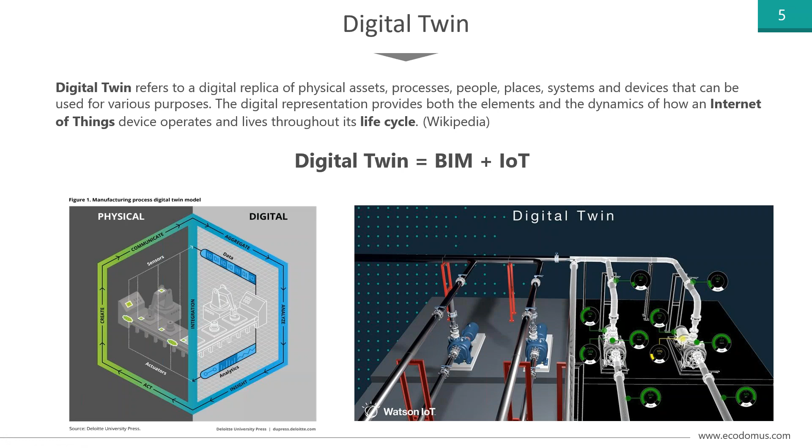As an example, I will show you the digital twin for one of our clients - it's the Sydney Opera House. I assume most of you guys know this building.

So here within Ecodomus, we will just show how the guys are using it. It's taken from the presentation the Opera House guys did themselves at the recent Build conference in Australia. All right, so here's the model.

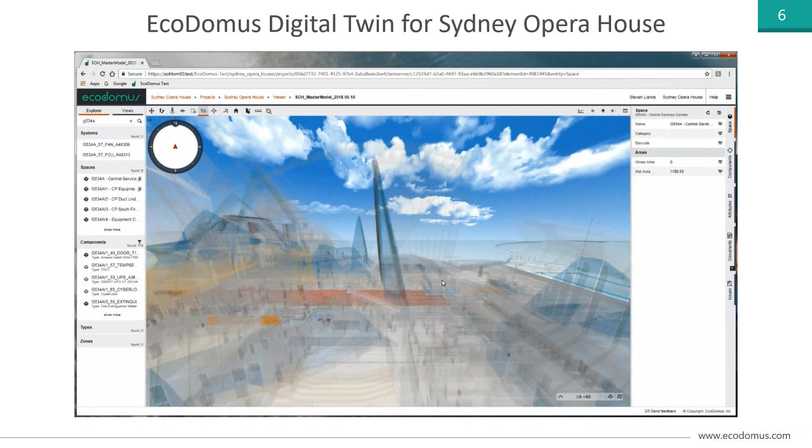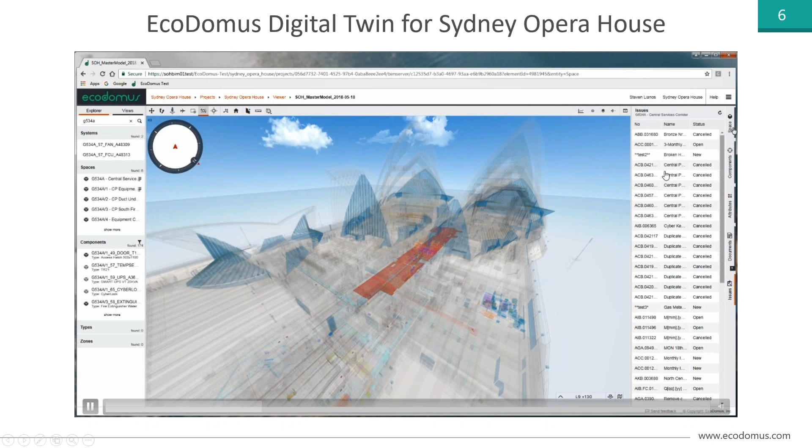So the user is looking for the space G534a. It finds some systems related to that space, finds a few spaces that have G534A in its name. So here's that corridor - now we look at all of the assets that belong to that corridor. We look at the attributes of that space, the documents associated with that space, and the issues or work orders associated with that space. So we have a lot of different information about it.

Let's say we want to move in and zoom in here. We remove the semi-transparency to look at the details a bit more. Here I selected a lighting fixture and look at its properties.

All of these properties have been extracted from the Revit model that the Opera House maintains. So I look at its attributes, I see the documents that are linked to that lighting fixture - I pull up this 50-year-old drawing for the lighting schema. And from here I can also navigate, go around, and I noticed there's some tag associated with some box here - so what is going on here?

I select this box and I see that there's an open issue. What kind of issue? There's a broken handle for this box. All right, so we'll handle it better next time.

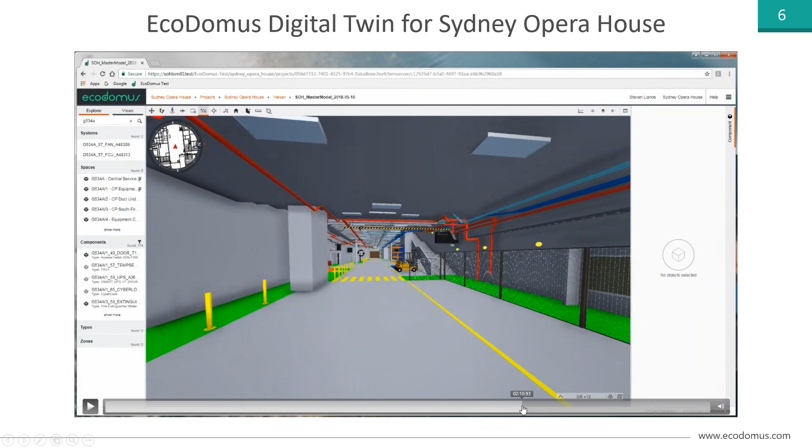Now I walk down this corridor. We are underground right now, below that top building. We can go to the chiller room here - most of you guys have seen chiller rooms like that before.

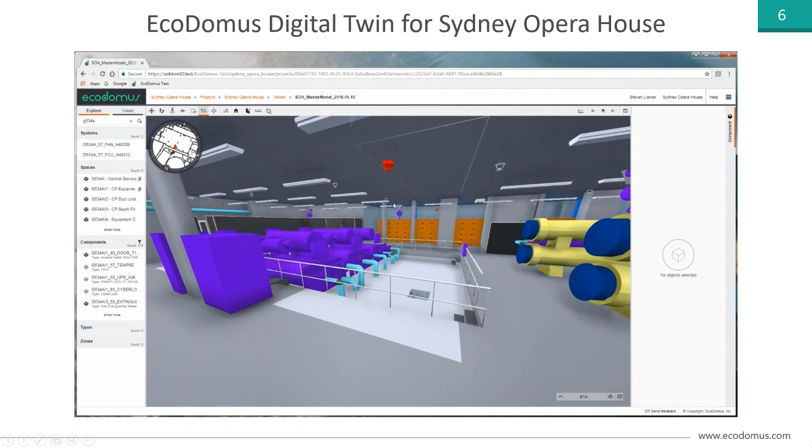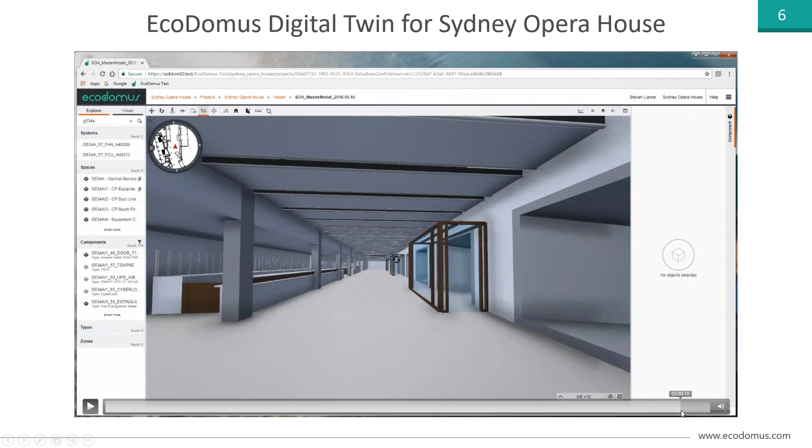Okay, so now we go into the stage. Turn on the layer with the chairs. We can review what the chairs are, or just walk down this corridor and go back outside. All right, so this is what BIM provided the Opera House.

And now we can just take as an example one of the rooms here and navigate within this room and look at some of the objects. So I see here there's a box - what is it? It's the secondary heating water pump.

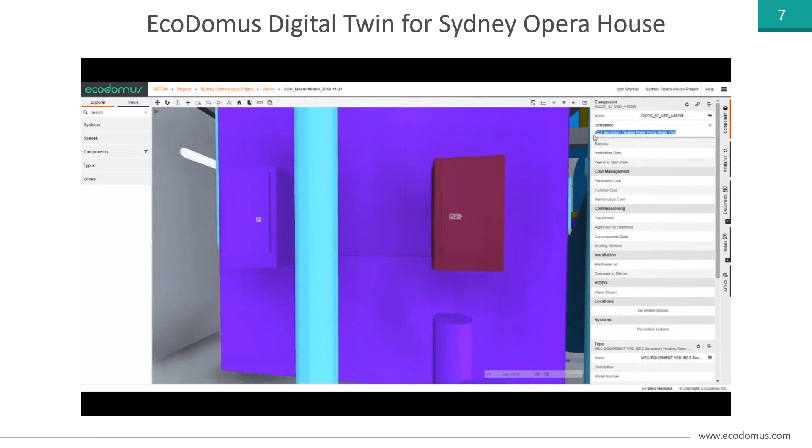And I believe I have some data linked to it from the sensors - some demo data sets from sensors associated with ducts. So I can review how these sensors have been performing. The data points can be linked to any object within the model. Okay, so that's how we are looking at it.

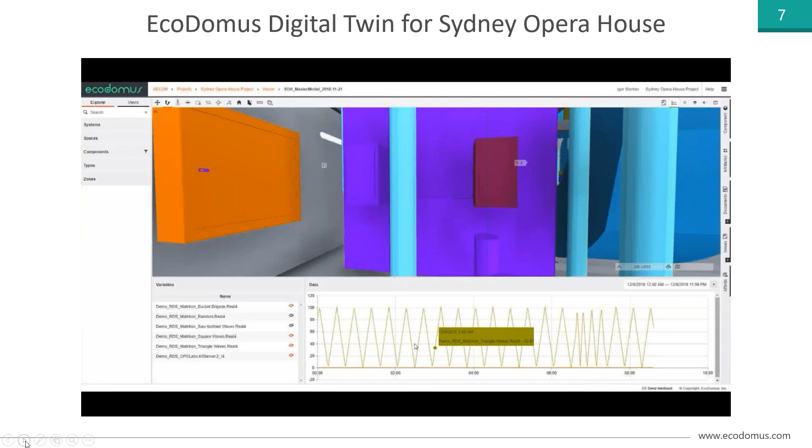I'll talk about some other applications that the Opera House is using where we'll talk about integrations, but this is just an example of how a digital twin can be used. Why would we need it? Why would anybody need it? There are lots of different use cases that can be applied and bring benefit to the end user.

As a case study, I took an article I saw online about a London airport - I don't remember which one - but they had a power supply issue. Something happened with the electrical system, it failed and crashed their servers. Obviously nobody knew exactly what happened because 99.9% of people have their electrical systems defined as a piece of paper, like here on the drawing.

What can we do with it? We can actually build a schema where the elements are still represented in a 2D diagram that is easy to understand for the traditional mechanical or electrical engineers, but this schema is linked to the BIM object.

So I can click here on this panel board and it will take me to the panel board's asset page, where I can review it in 3D BIM, see its real-time data points, or just embed values from the sensors that are linked in real time to the IoT BAS sensors.

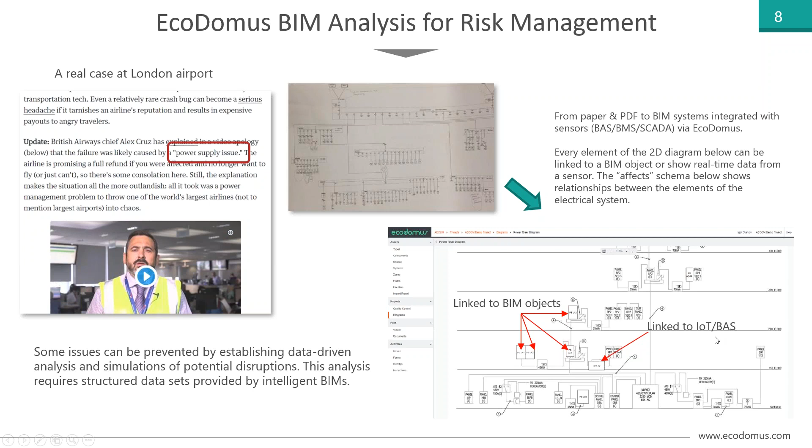Another use case happened at Moscow airport, where they had a small fire in the baggage sector in a small room, but the smoke got into the main terminal and they had to shut down the terminal for the whole day. The losses from just one day of 50 flights delayed could have covered the whole BIM, GIS, and sensors implementation for the entire airport. What we could have done is identify which dampers need to close automatically, or need to be closed manually, by connecting the sensors and the BIM.

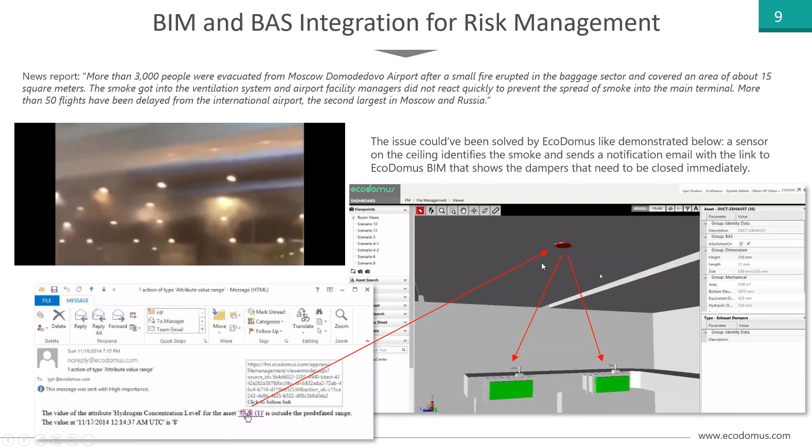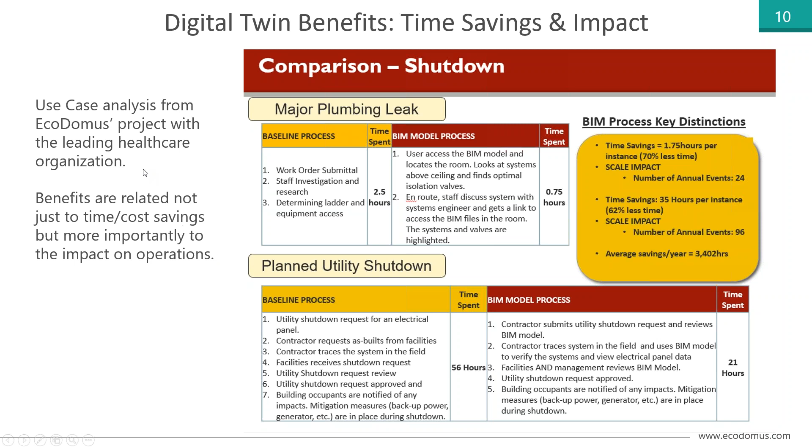Another use case relates to a client we had in the healthcare space. They analyzed the time spent on things like a major plumbing leak or a planned utility shutdown. Using BIM, IoT, GIS and other integrated technologies, that time could be significantly reduced. After extensive calculations, they identified how much they could save in money, but even more important was the impact savings for the healthcare organization or critical facilities like data centers. It's not about the cost of the engineer, it's that every minute costs tens of thousands of dollars. This kind of analysis shows the benefits of utilizing this technology.

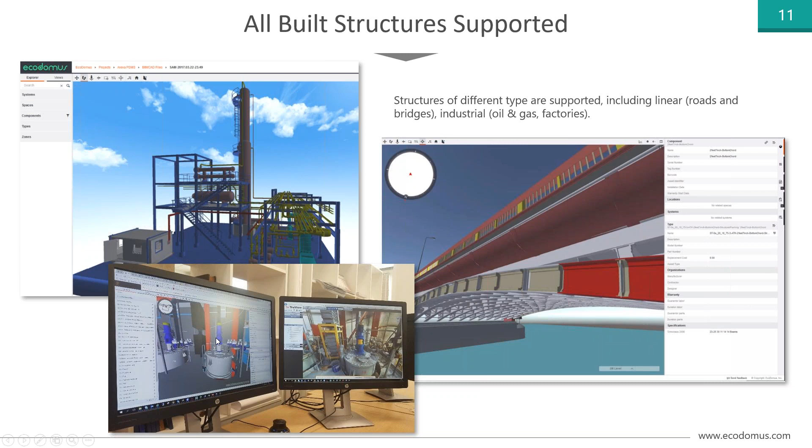And it's not just for buildings. Here are some other examples of digital twins. You can do that for oil and gas refineries, for bridges and highways, for industrial facilities like factories, process plants, wastewater treatment plants—all different kinds of structures. For the software, it doesn't really matter whether you deal with a kindergarten or a nuclear power plant, it's just a matter of scale, at least for our software.

So what is CDE now? We discussed that a digital twin is great, but how do you get it? You need an environment where you assemble all the information related to this model, and connect it to the sensors and everything else. CDE, Common Data Environment, is well known in the UK and Europe because it's part of the PAS 1192 standards, but not as well known in the United States and other parts of the world. CDE is a central repository where all of the facility information is housed. Contents aren't just limited to assets, but also include documentation, graphical models, and pretty much everything.

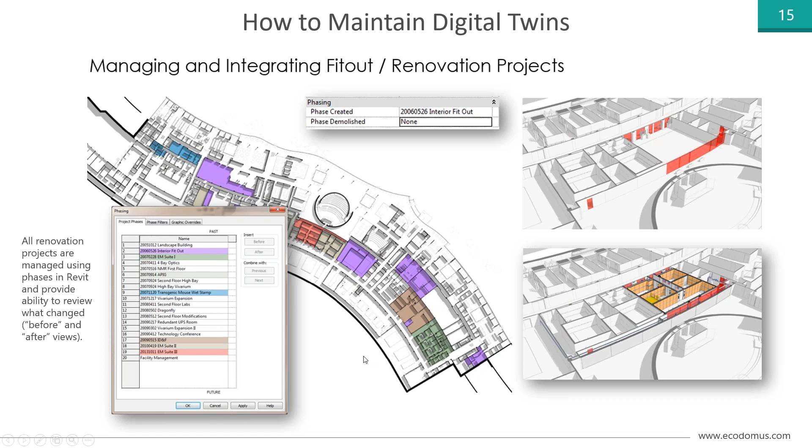So they have the complete history of the building, and imagine the value of that where you know everything that happened. It's the same as when you get a car and the seller gives you all the oil change documentation and everything is clear what was going on - you'll get maybe 5-10% extra added to the price. With buildings, it's as if nobody cares, but it's definitely valuable to have the historical information. It increases the resale price.

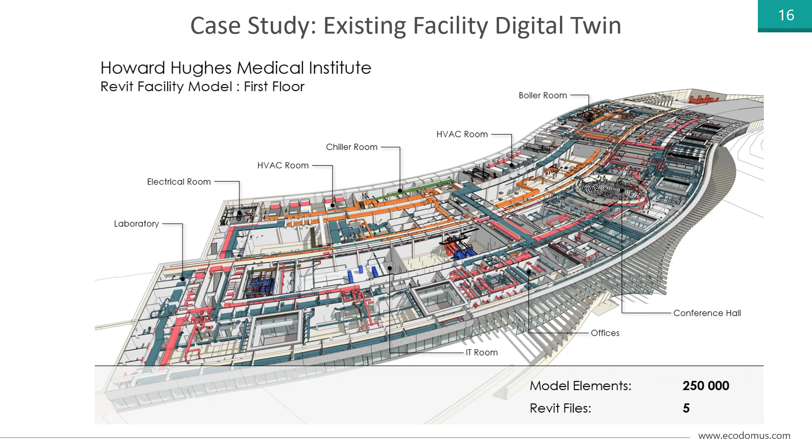Here's the same facility. One interesting fact is that this model was developed for the existing building - it was not built from BIM from scratch. This was done over 2-3 years. They didn't rush it; it was a background activity for the client, built as they had time, as we were helping them with it. It's a complex, curvy building - I don't think there's a single 90-degree angle here - but all of it is highly accurate and all the systems have been connected.

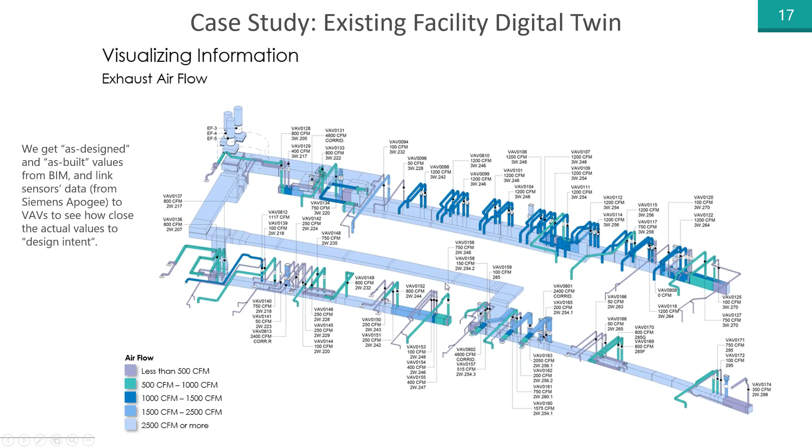So what we're doing right now is connecting all of these VAV boxes, with data calculated in Revit for how they're supposed to run. We're linking it to Siemens Apogee BAS, and now we're seeing how it's supposed to run versus how it's actually running, so the end user can analyze what they need to do with it.

What kind of standards exist for all of this work? We showed you the benefits and how it's supposed to be built. The standards we like are primarily based on the UK 1192 standards - that's where the definitions for asset information requirements come from: asset information model, project information model, etc.

US National BIM standard - I'd say it's okay, but nobody's following it. I know because I was part of creating it. It's a bunch of volunteers who spent some time and did it, but we didn't have the significant financial support that the British guys had.

So what typically is important when you develop these information models? What requirements matter? You need to define the asset types relevant to your use cases, what attributes you want to collect, what document categories you have, how you're going to be collecting this data, how you can be preparing, and when this data is going to be collected - obviously not at the last minute.

We want to do it throughout the whole process in order to establish quality control properly. Who is going to be collecting this data? It's not just that one BIM guy in the corner who needs to do it all - it's impossible. If you need to collect the project information model correctly, you need a lot of people involved.

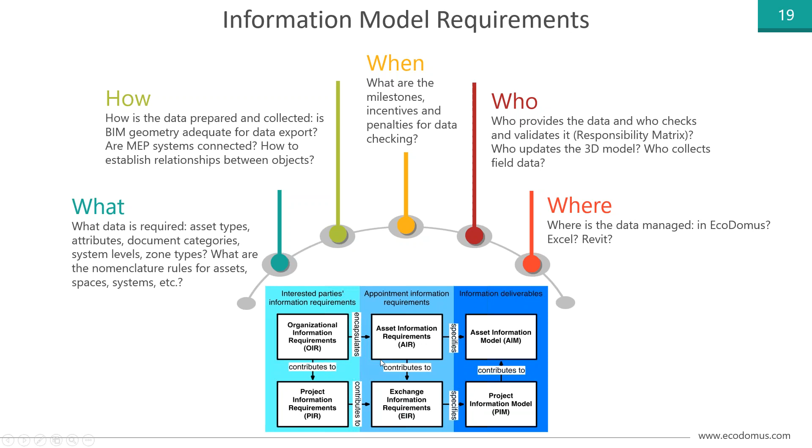Now let me show you some examples of how this data is all being collected. First of all, yes, this schema is what you probably have seen before. This wedge schema is BIM level 2.

Right now, as mandated in the UK, everybody talks about level 3, but it hasn't been formalized yet. So where we are right now, the red line here, is everybody is more or less comfortable with level 2, but doesn't know what to do with level 3. Level 3 is actually going to be a pretty interesting thing. It's looked at as an integrated web services BIM hub, where all of the applications talk to each other in real time using web services.

We were doing this from the beginning, using web services and doing the integrations and collecting all of the data. That's why we believe this is pretty much doable even now, without waiting for BIM level 3 to be formalized.

So this is a good schema to show the PIM, project information model, and asset information model, right? So it starts in design, goes through construction, into handover, and then into operation and maintenance, and then starts again, right?

The good thing about the standards, the ISO standard, was just approved, I believe, in December of 2018, for ISO 19650-1 and -2. Two of the sub sections of the standard have been approved. This third one, 19650-3, is now under development. So 19650-2 is about the handover, and 19650-3 is about operational use.

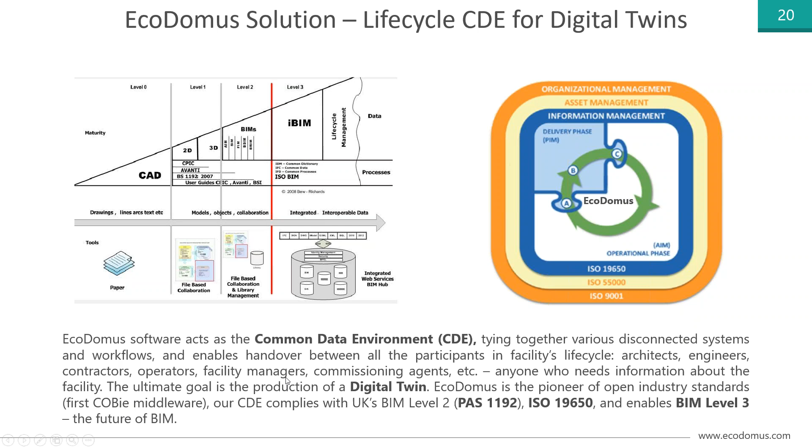What I would suggest also to think about is what's happening on most of the projects versus how it's supposed to be done, right? So I showed you examples of good digital twins, but unfortunately that's not the reality.

The reality is, what we get on average on so-called BIM projects, they are not really about information modeling. They're all just about 2D deliverables, really bad naming conventions, properties are missing, systems - nobody really seems to be interested in connecting systems - duplicate assets, surface overlaps, etc. So we get really bad models a lot, and sometimes we spend months, if not years, to clean them up.

So what we suggest is, before you start modeling, establish proper requirements, establish a systems matrix, establish naming conventions, define all of the attributes, define the QC procedures - because otherwise all of these standards don't really mean a thing, right?

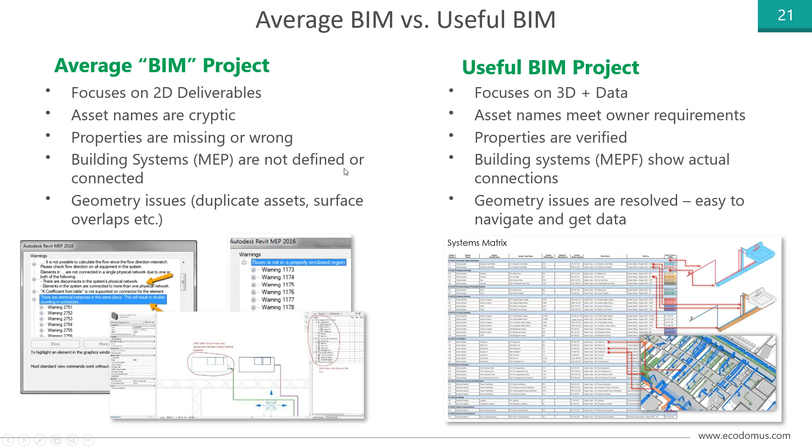What we see is that it's not just because everybody is lazy - it's a lot of times because the owners didn't specify anything. There are no requirements. When they don't ask for anything, then the contractors and architects don't know what to provide. The other thing is, even if you use an advanced authoring environment like Revit or ArchiCAD or Bentley, quite often you're not using it to full capacity.

You still continue to draft in it, because if the final result needs to be produced as a 2D drawing, then why do I care about the systems, let's say, right?

The good thing about the standards, especially UK standards, is that new types of job descriptions are being introduced, like information managers. So it's not just the clash coordination guy like in the past. There are new types of employees focusing on the quality of information - information managers. So we suggest thinking about having these information managers, which is a cross-discipline position. They need to understand not just what the BIM looks like, but also what the other applications involved look like - their data structures - project management solutions, CMMS, CAFM, and other solutions, right?

Again, think about the tools you're going to be using. Obviously, if you use Excel, you're going to be limiting what Excel can do for you. Schedule delays - I always suggest linking the data collection activity to your construction schedule. Very few people do that.

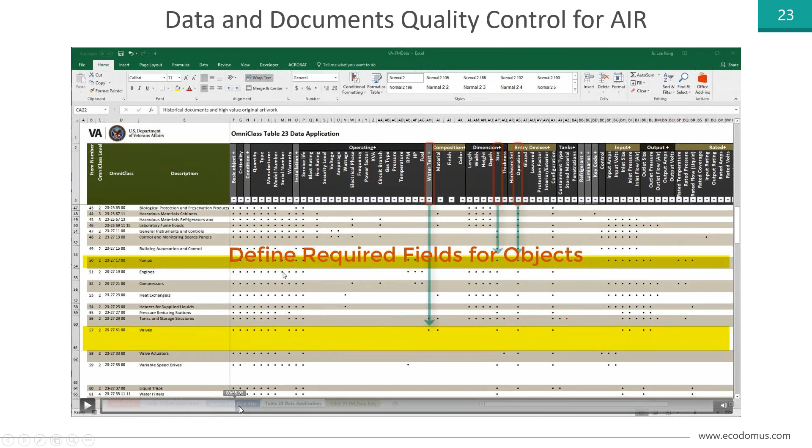Within EcoDomus, we can actually establish a similar schema. We can define the structure of the disciplines and categories required, and we can define the list of the fields that the customer cares about, and what are the standard naming for those fields. And then we can build a structure where we map required fields to required categories.

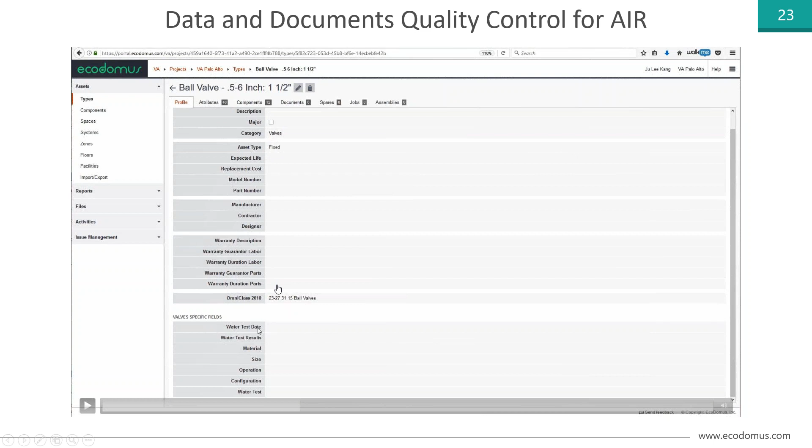Let's say for pumps, we need this field. For valves, we need this field. And these fields will be shown on the interface when you collect that data. Let's say I have extracted data from a model. I see my ball valve. I see the generic fields needed, and I see valve-specific fields needed. So I'm not looking at 150 different Revit BIM object files from the BIM library and figuring out which ones I need to populate, which I don't.

Then we can define the requirements for different stages. Let's say for the as-built stage, we specify that for pumps we need these fields as mandatory, and for valves we need some other fields mandatory. We can also establish ranges of acceptable values, lists of acceptable options, or other predefined values within the fields. We can also define what documents are needed for different types of equipment. So all of it can be set up in the configuration.

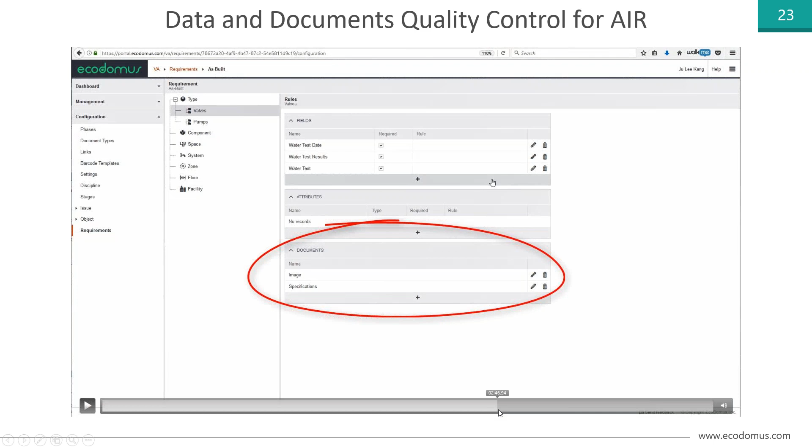And then we run our quality control, and we understand what is it that we're missing. So let's say here in this specific example, we see that our valve is missing these 3 fields and those 2 documents. It's easy to fix. You can select your documents and just drag them into the application here, and it will upload those documents, and the documents will no longer be missing.

So it's not like in Solibri where you need to republish the IFC file, then somebody fixes the original model, then republishes the file, then it goes back and forth. The same system is used for both data collection and for quality control.

The other thing that I do like is building custom saved queries, or we call them filters. You can define any criteria for any attribute for any type of your entity within the model. Let's say for systems, for types, for components, for spaces, you can use the standard attributes to build formulas and save those formulas. Let's say your doors need to start with DR dash and then some number. That's just a formula that's developed and saved, and everybody can reuse it.

Here's an example of how we can do that. Let's say we have here a bunch of various filters. The first filter I will open is called VAVs that cost more than $200. So name contains VAV, purchase cost greater than 200. I found 15 types of VAVs, actually components of VAVs that satisfy that condition, or assets that are commissioned in January 2018.

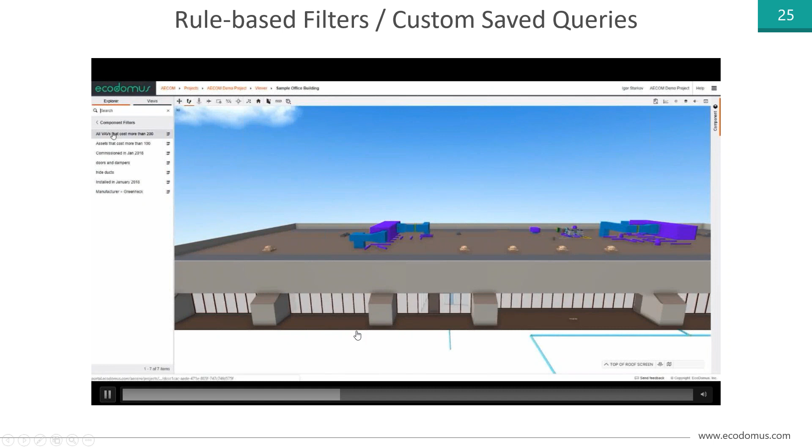Filtered, and I found them. I can use the same filters in the viewer. So I select the viewer, select the filter, all VAVs costing more than 200, and I see all of those VAVs, 15 of them. And to see them more clearly, I change my opacity in the viewer a little bit so they are more distinct.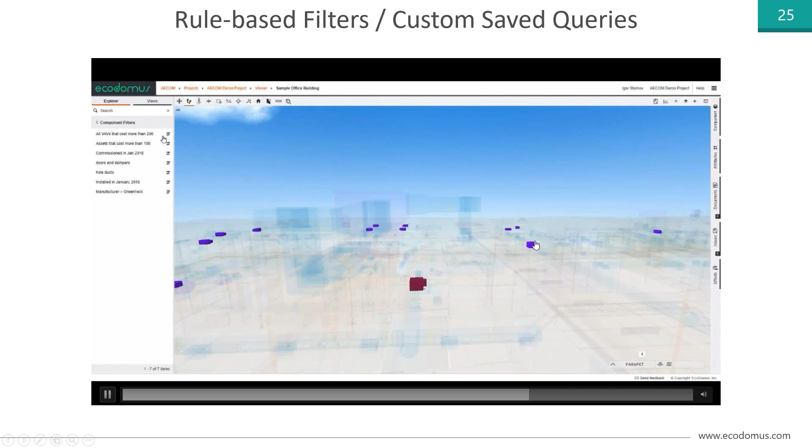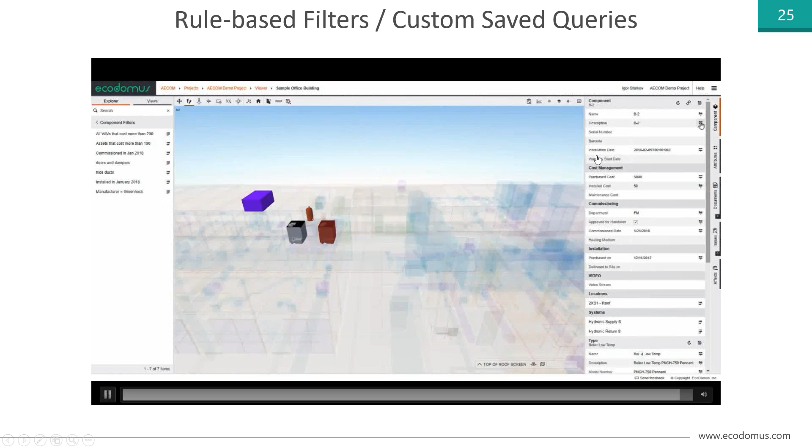So, this VAV is VAV1103, and I see its properties, attributes, etc. Or I can navigate through the list, select this VAV1120, and find it in the model. The same way I can go into my commissioned in January 2018 filter, and it finds me objects that have been commissioned in January 2018. Select this boiler, and I look at its properties and investigate it further.

So in order to ensure that, we suggest definitely having the proper language in your contractual agreements and requirements. We do have a few templates that we can share. They are not Ecodomus specific. So if you have a desire to move into this direction and want to improve your data collection and implementation technologies, we can share this with you.

So how do we help? First of all, we explain how to create models that are useful and not just fancy with good 2D drawings, but those that have proper data sets. We provide the technology to ensure those data sets are satisfying the conditions. We optimize the work of multiple contractors and subcontractors, so you can extract only the section related to mechanical subs or electrical subs and make sure they are entering the right data. You have the means to communicate with them about the missing attributes and make sure they understand what needs to be fixed.

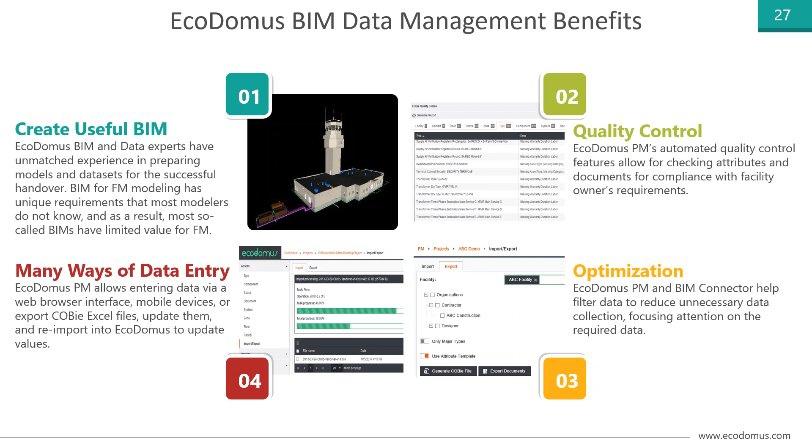And we also provide different ways of data entry. So online app is one way, but you can also provide them with mobile tools like iPad and smartphones. Or if they say no way I can do anything except in Excel, that's doable as well. You can extract the Excel file from the federated database, update that Excel file, and re-import it again.

So now let's look at the traditional 2D workflows. Because even though it's not really about BIM, how we typically look at it, we still have to deal with 2D documents and files and understand how to manage it.

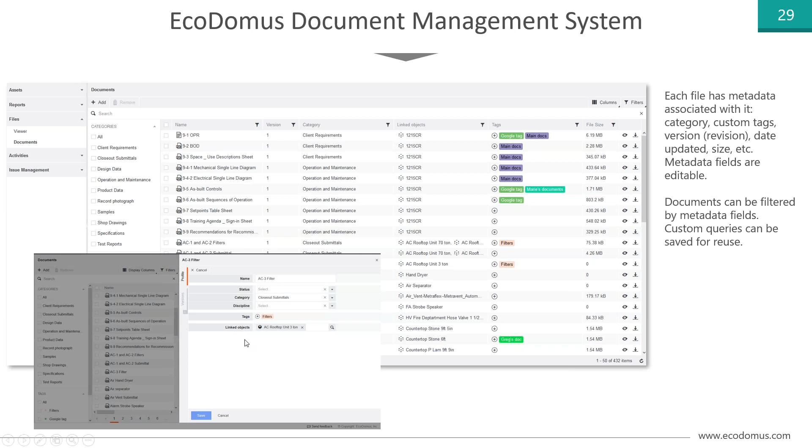Fortunately, we have a full electronic document management system built into Ecodomus, where every file is tracked with metadata, and you can customize what kind of metadata is developed. We have the ability to publish files from Revit that synchronizes your navigation in both 2D and 3D in a split screen fashion, so as you navigate in 3D, you see your cursor moving in 2D. We have the red line markup capability to mark up your typical PDF, DWGs, DGNs, and attach those markups to issues and manage those issues. We have check-in, check-out, versioning of the documents.

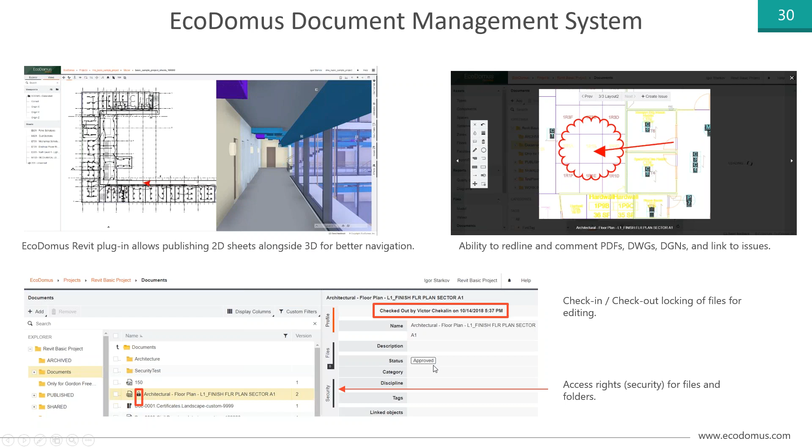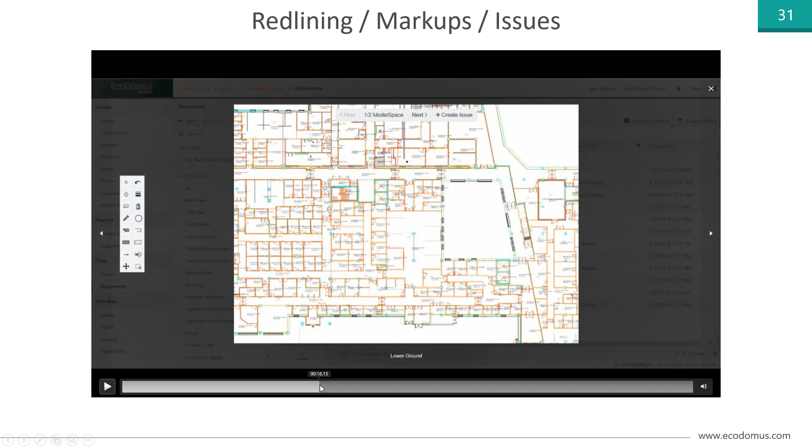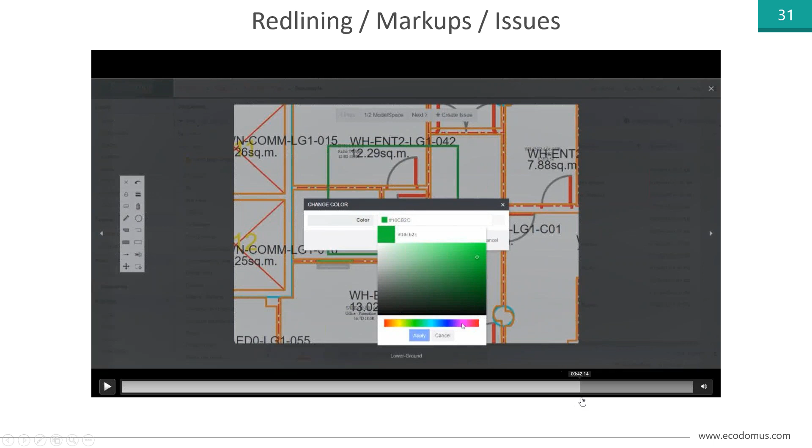Here's an example of redlining. You drag your document, it's uploaded here. You turn on the editing, zoom in, select the thickness and colors for your markups. Let's do it in green, or let's do it in purple or pink. And then we can create an issue and it will be tracked as an issue.

Or we can do the PDF tags. This is not obviously something innovative, but it's something people do like to do. You select the PDF file, and then you can place a tag on it and link that tag to either a BIM component or a space from the model or to an issue. Then next time you can jump from the tag to the asset profile page, to the component profile page.

Customizable workflows, we have the business process builder, so you can define an unlimited number of different workflows related to your documents, issues, and inspections. These are draggable boxes where you define what happens when a document goes from work in progress to the shared state, or from shared state to published, or from published to archived, which is a typical PAS 1192 workflow. But you can customize it any way you like.

You can also define auto naming, so as files are being uploaded into this folder, you can define by folder what the appropriate name will be based on the metadata, based on the auto name template fields.

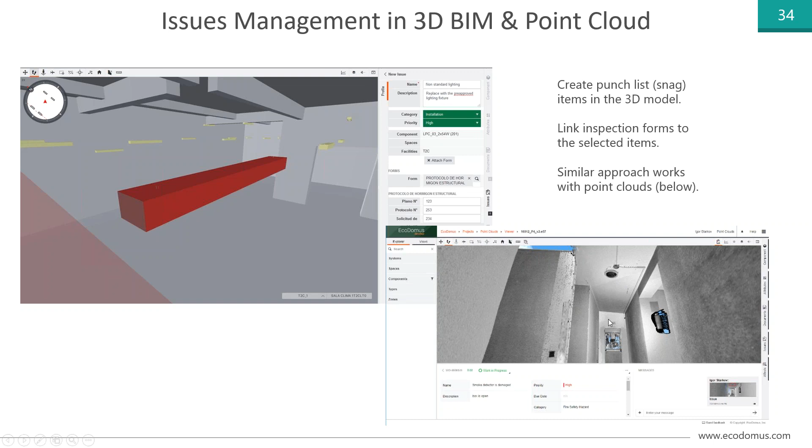For both of them, you can create issues and track this. Let me give you an example of how you can create issues. Let's say you navigate here in your model, select this fan. You can see the fan properties if needed, but in this case I just want to assign something to the fan. So you see the fan is selected, the space is selected.

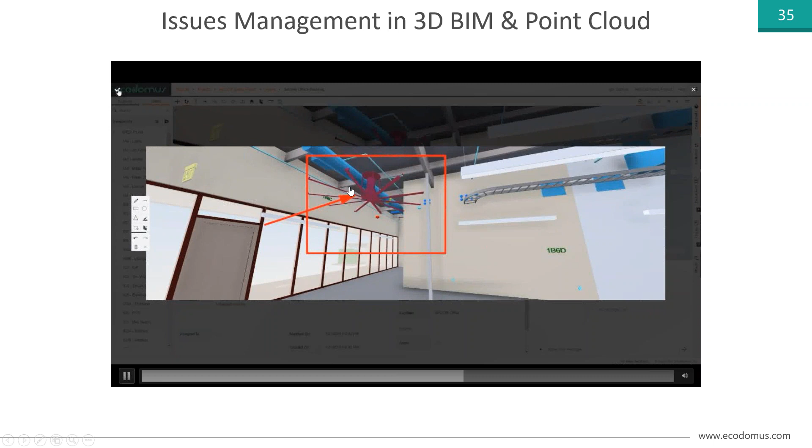So I'm saying the fan is not working. It worked in the morning, then bang, it stopped working. I can assign a priority and assign the person who needs to work on it, and I've just created an issue. The good thing here is, first, the issue is linked to this object, and second, I can take a snapshot. It takes it automatically, and I can mark up this snapshot.

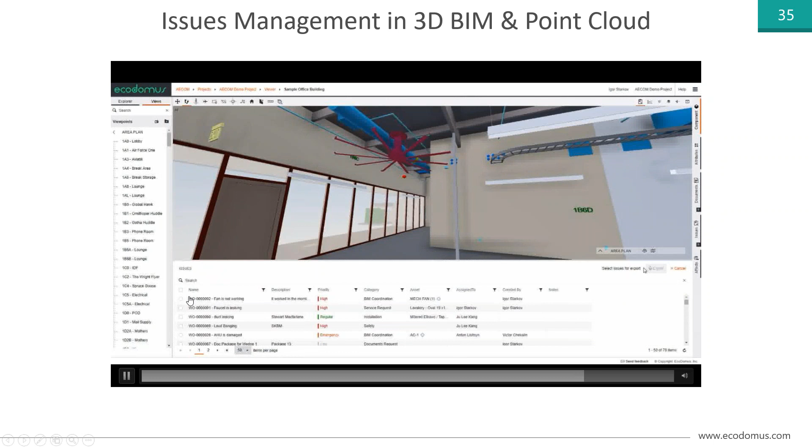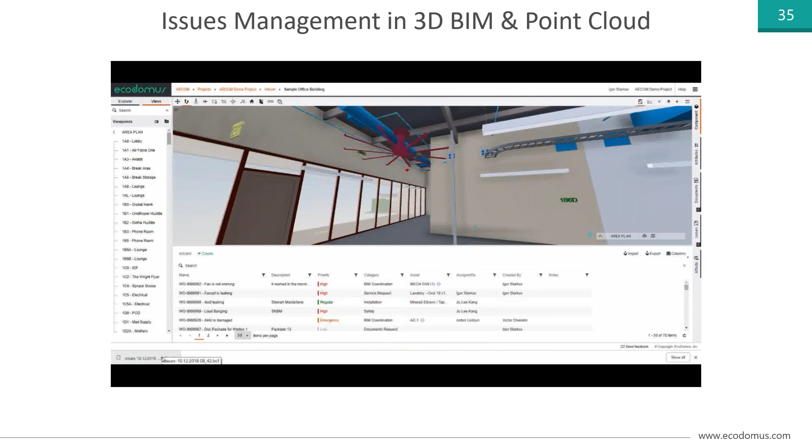I can attach that snapshot to this issue. I can add a comment, because that's what one of the standards I'll mention requires. So now you have the issue, marked up issue, and the issue. What you can do is select a bunch of issues and export them as a BCF file. For those who don't know, BCF stands for BIM Collaboration Format. You see it generated my BCF file. BCF is supported by other applications like Navisworks, Solibri, and a few others, so you can exchange your issues with other applications.

Because BIM is so detailed, it now enables this schema for integrating technologies that in the past had to be point-to-point integration. So we take the data, say, from the geometry authoring applications. People call it BIM application, but I don't like to call it that, because they don't really do information modeling, they primarily do geometry modeling. We take that geometry data, collect it, and integrate it with other sources of data, say project management tools, or CMMS, CAFM tools, or sensors from SCADA or BAS, electronic document management systems, ERP systems.

Increasingly, we see a lot of potential integrations starting with new technologies like drones. We're doing right now a pilot project with indoor navigation drones based on BIM, doing space mapping, etc. We're also doing vibration sensor integration, CCTV, video streaming, augmented reality. Everybody's asking us about AI, even though nobody's going to do it, but everybody has to ask. Predictive maintenance, etc. There are so many new opportunities here the head is spinning, but it's doable.

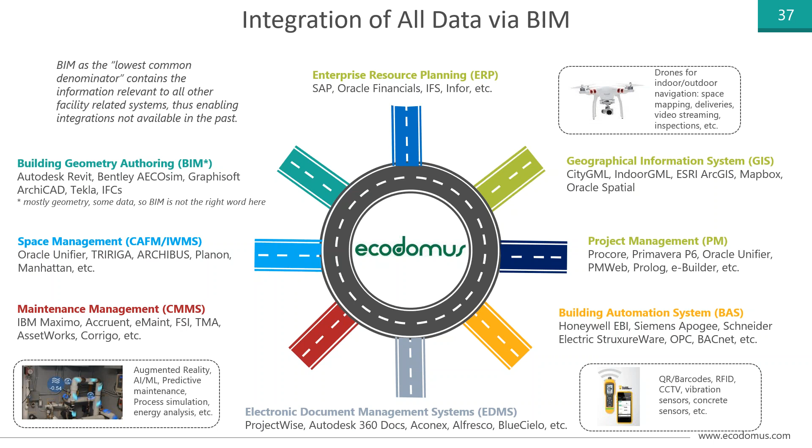My personal feeling is that technology is now far ahead of what humans can absorb. So I'd suggest we look carefully first at what we want to implement versus what is doable, because everything is doable now, guys, everything, it just needs to be careful. When I'm asked about advanced integrations, I say first try to learn how to name your assets properly and how to store your files correctly. Then let's talk about artificial intelligence, because AI will not do it for you.

So here's an example of the integrations we're doing at Opera House right now. We did integrations with the asset register, the work order management system, the engineering drawing system, the custom database of rooms and doors. We use the Revit models. There's integration with the content management system, and now we're doing the integration with Honeywell.

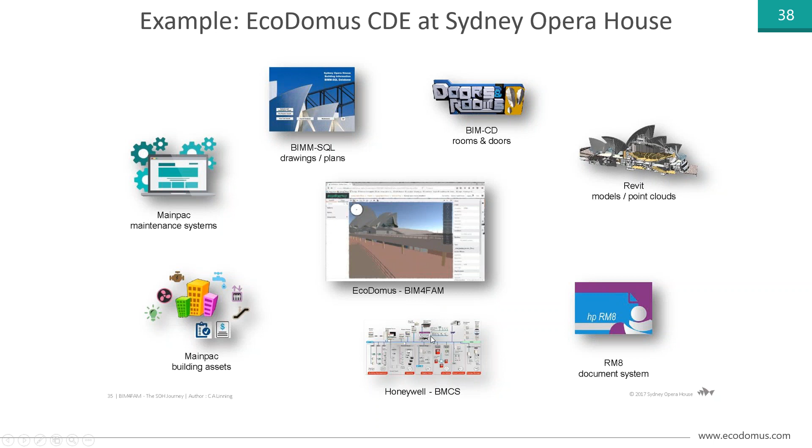Just an example of what we like and don't like about integrations with other applications. We like integrating using APIs, especially the API of the other package. We have our own API, which is REST-based. We don't like integrations using files, especially using plugins like the popular free COBie toolkit for Revit. Nothing bad about it, it's just not the best technology for doing it, because it's a one-way upload of data, and usually the model is rarely in good state or condition to be extracting data anyway.

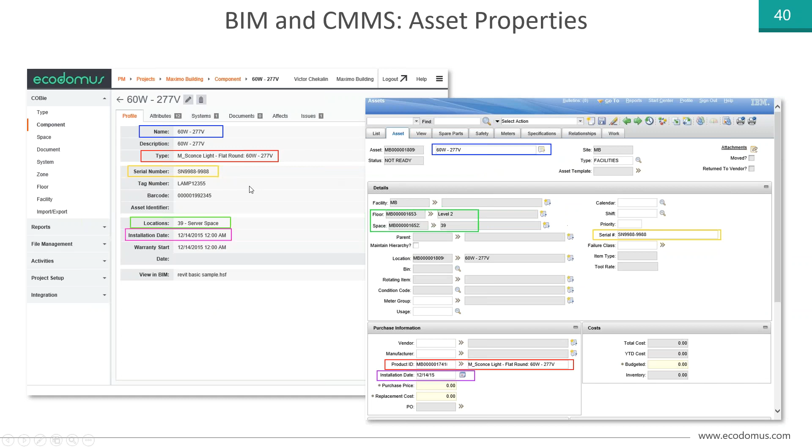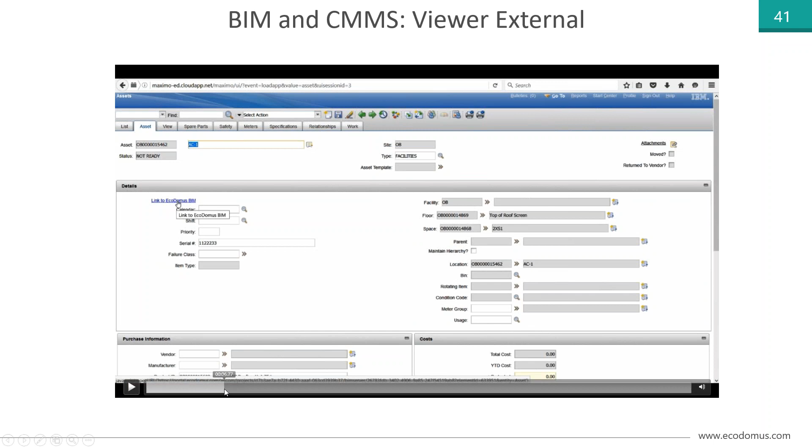We typically, when we do integrations, we do data field mapping and bidirectional integrations all the time. We can embed links that open our application straight in the viewer. Let's say you're in Maximo at the profile page of air conditioning unit 1. You click on the link and it takes you straight into the AC1 viewer within Ecodomus.

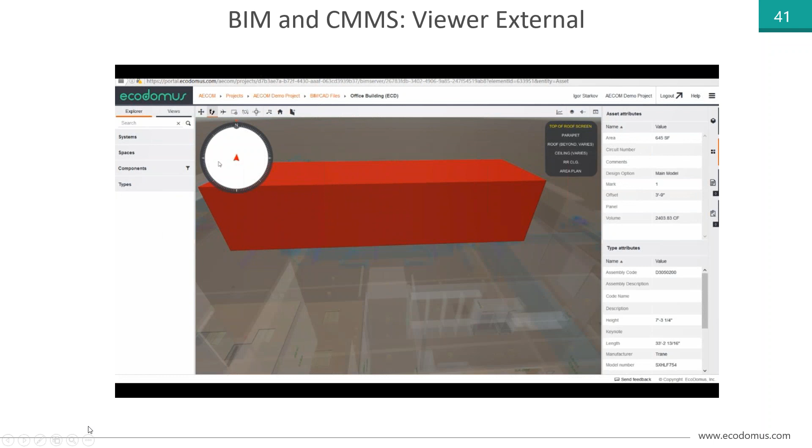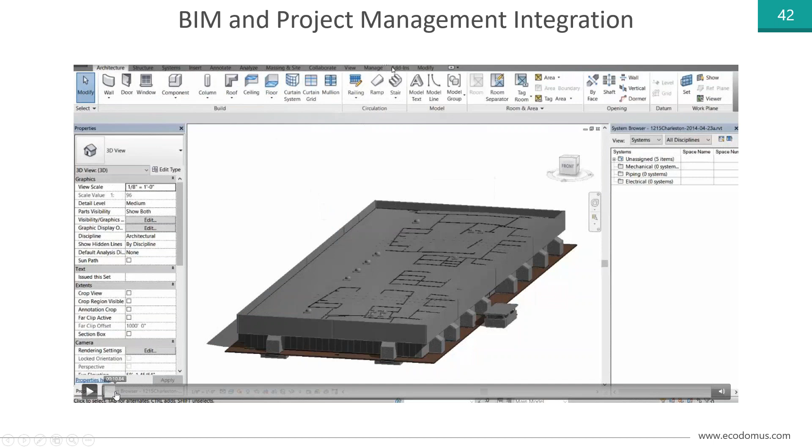Here's another example of integration with Primavera Unifier, a project management toolkit as well as a facility management toolkit. Let's say you have your Revit model here. Revit has our BIM connector plugin, which helps you select which data from the model you want to extract. Obviously you don't want to extract annotations, for example, so you select what assets you want to extract and send them from Revit into the Ecodomus database.

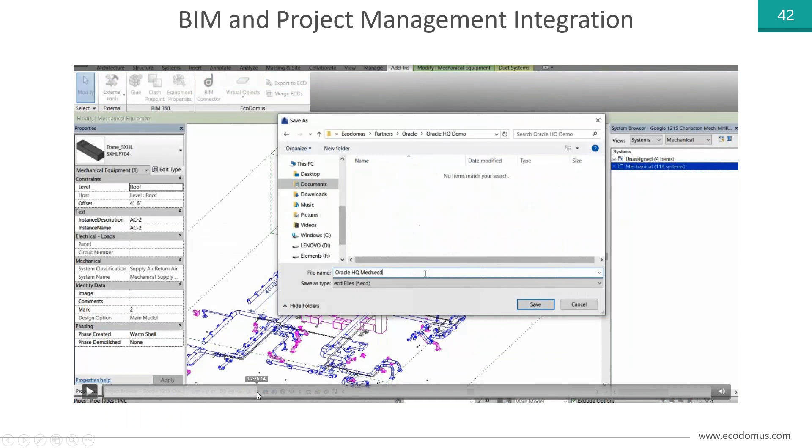You publish the 3D geometry from here into Ecodomus, and now you have the virtual copy inside Ecodomus. From here, you can publish it downstream to other applications. Here's your AC unit, here are the properties, and now we are in Unifier. So we can populate Unifier assets using this integration.

Or we can also exchange data with Unifier project controls. Unifier deals with both projects and facilities. So we can exchange the submittals, and we can build the asset register within Unifier, as the submittal register is based on the BIM types. Each time a subcontractor uploads a document inside Unifier, we can see that linked automatically to the BIM entity, so when we extract the data, nobody needs to manually associate assets and documents.

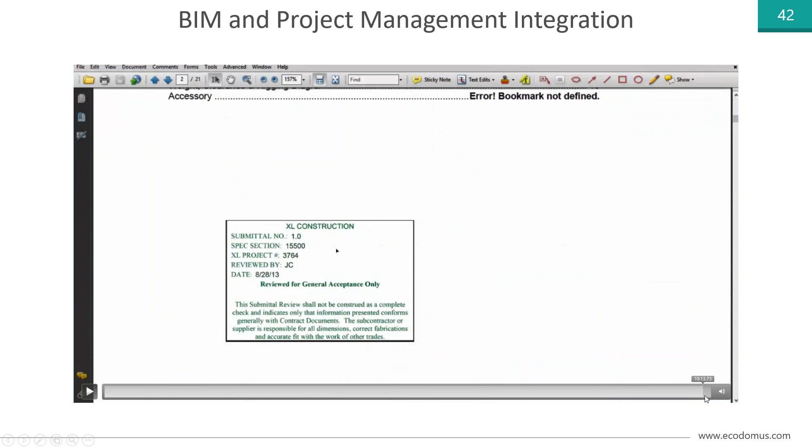Here we generate a COBie file, and the submittals are linked to the assets.

BIM and GIS integration is also a popular topic recently. Here's an example of what we did in the past, and I'll show you what we're doing right now. Let's say here we go into the campus - this is the Google building here - so we look at the satellite view and see those air conditioning units.

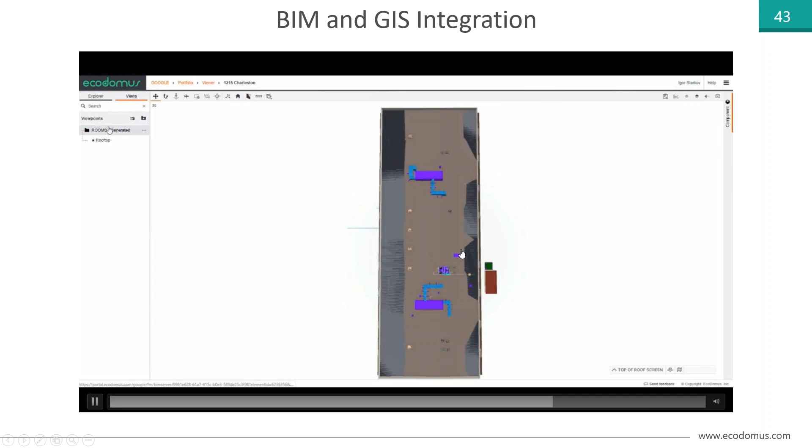Now let's go to that profile page within Ecodomus. We see that facility, some basic data, and documents related to that facility. Now let's look at that facility in the viewer, and here's the same facility now with BIM. From here, we can jump into an individual location.

Let's say we go into the kitchen, and now we navigate here within this kitchen. So we went from the bird's eye view down to the coffee maker view.

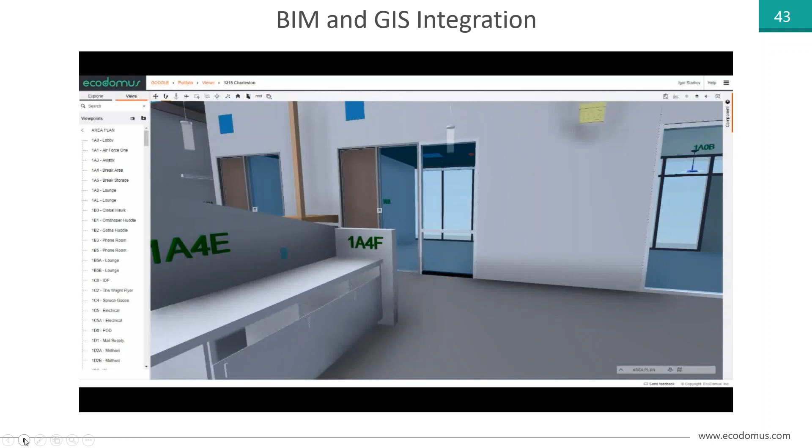We also started supporting CityGML because more and more customers talk about cities - we have a couple of clients that manage cities, not just individual buildings. So we started supporting CityGML and IndoorGML, which are open standards from the Open Geospatial Consortium, OGC.

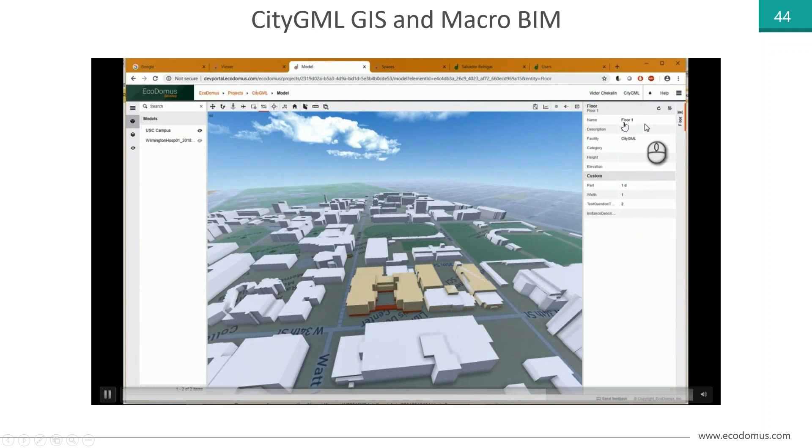Here's the campus of the University of Southern California, done in CityGML. As you see, these buildings are just LOD 100 level buildings, with just basic information like total square footage. But within CityGML we can also define floor properties or building properties or individual floor properties, and from here you can so-called explode the model to navigate into full LOD 500 BIM.

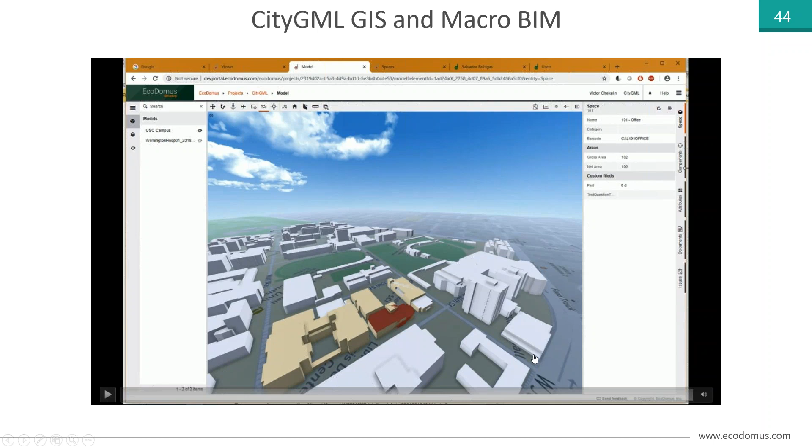So now let's move quickly to BIM Mobile. We have only 10 minutes left, so a quick look at screenshots of the iPad application - we have Ecodomus Mobile on iPad.

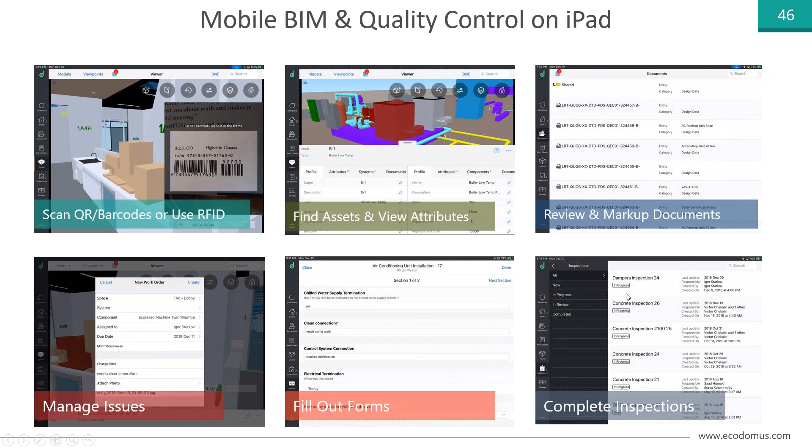You can scan QR barcodes or use RFID, find assets, review their attributes or edit those attributes. You can have access to your documents - we support folders, document views and markups. You can create and manage issues related to some objects, fill out the forms. You can create custom online forms and then use them on an iPad. You can schedule inspections online and use them, filling them out using the forms on an iPad.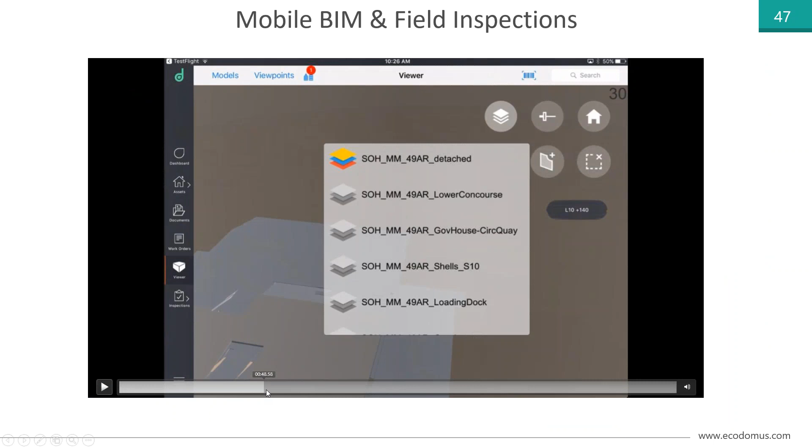Here's also a quick video of navigation within an iPad. Let's say here's the concrete inspection - we're going into the same building, and let's say we have some concrete slab in front of the building that has some challenge. So here's that slab, and we create a work order: crack in concrete, take a photo, attach the photo to it, and now we're done.

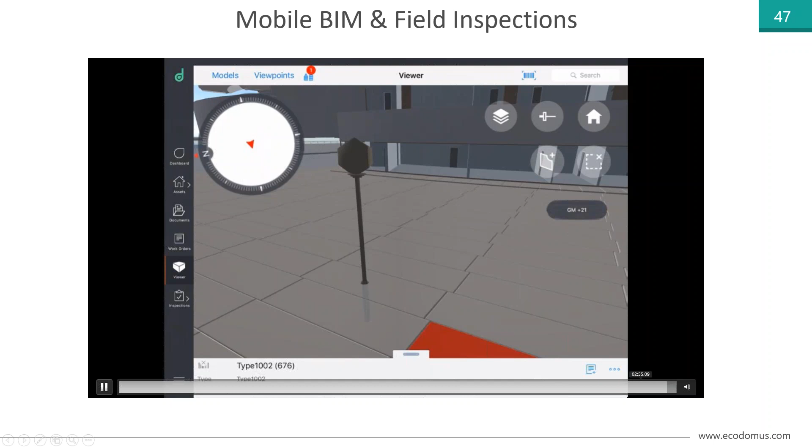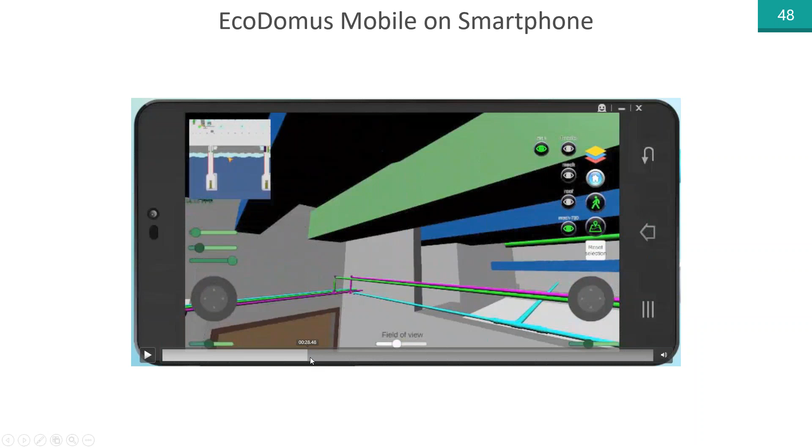A similar approach can be used on smartphones. We support Android and iPhone. Here's an airport in Saudi Arabia. I can select an object, see its properties, change the properties, or create a work order for it—let's say it hasn't been installed correctly.

Quickly about Internet of Things. Everybody talks about it, but few people define what things they're trying to connect using sensors. Our approach is exactly describing those things—that's what BIM is. Every thing in the model is what we collect information about, and then we connect it to other things, to other sensors.

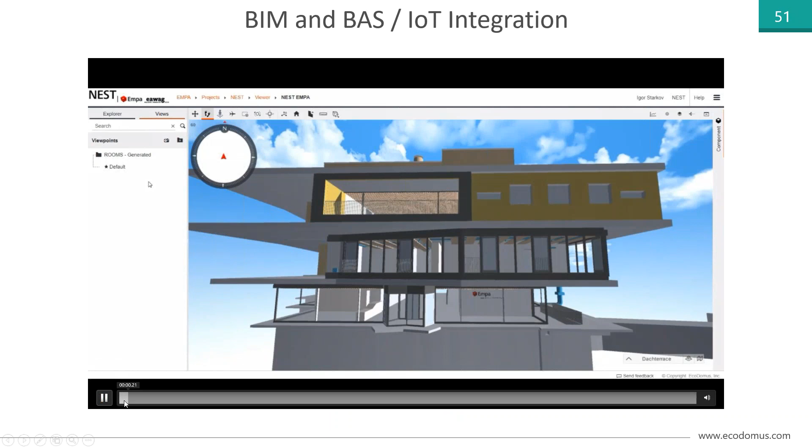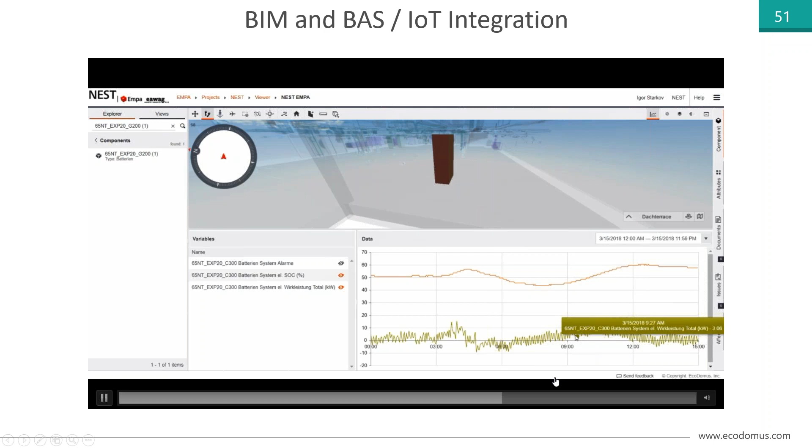Here's an example from Switzerland, a research institute, NEST-EMPA. Let's say we find some asset here—I see that asset in my model, but I also have the information for this asset collected over a period of time. So I can review my data points here and build some analysis solution around those data points, compare them. You don't have to have the 3D for that, by the way—the same information is available even without the 3D.

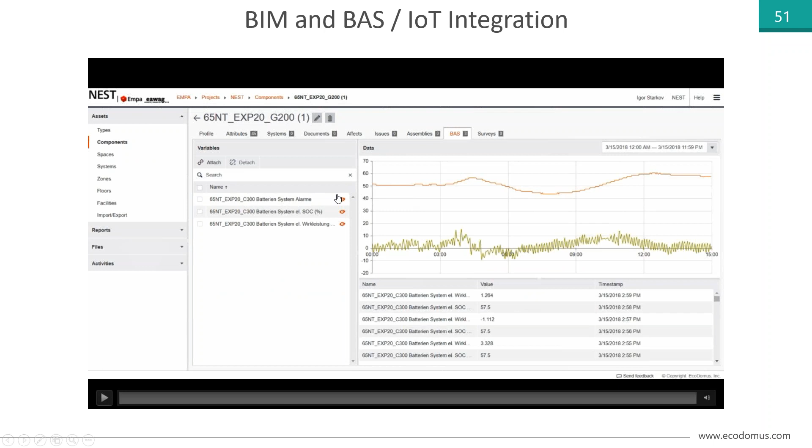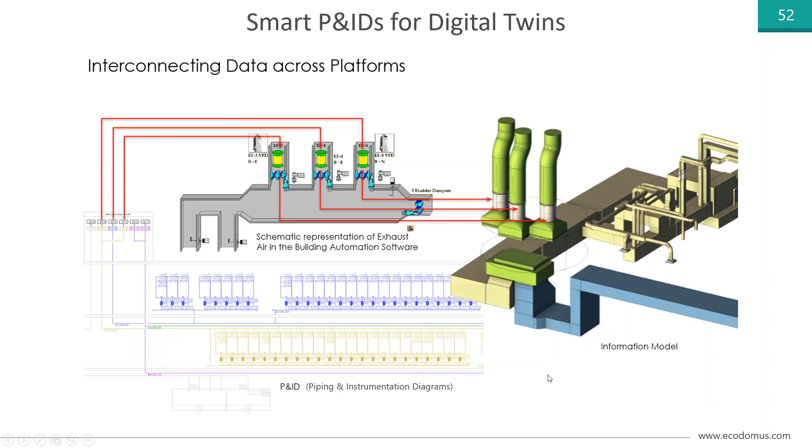You can also link your data to the P&ID diagram, the piping and instrumentation diagram, so the BIM and the 2D can be interconnected. Same client, NEST-EMPA. Here's the traditional 2D drawing, and I've embedded into this drawing some values from the real-time sensor. I can link some sections of the diagram to the BIM object—so I just jump from that 2D to the asset profile page, and now I say show me that asset in 3D, and here's my asset in 3D.

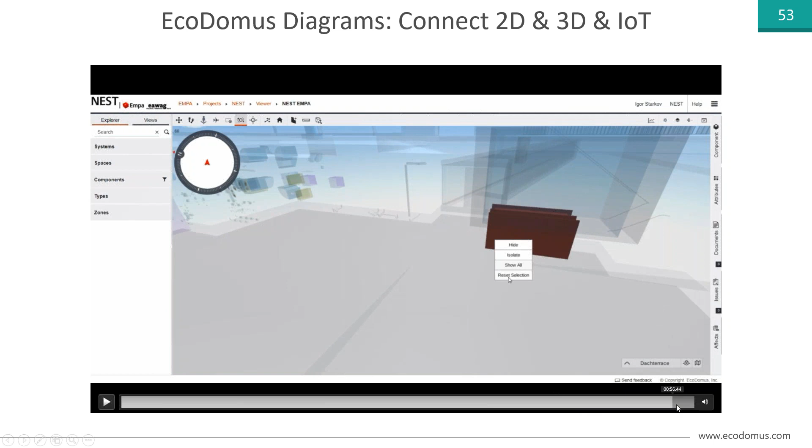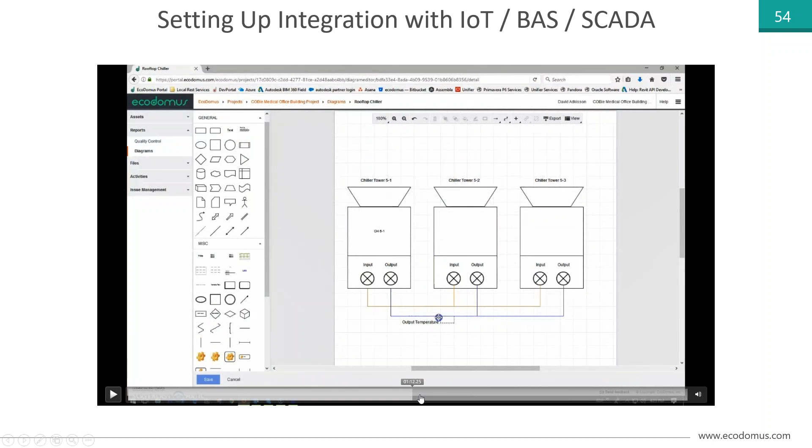It's pretty easy to set up these integrations. Let's say you have these BAS data points—you select which data points from your connection you want to use for this asset, and now this chiller 5 is linked to the building controls. Then you open the diagram builder, which looks like Visio. You can drop a box onto the diagram and say this diagram is linked to that asset, and now your diagram shows this asset embedded. It's pretty simple.

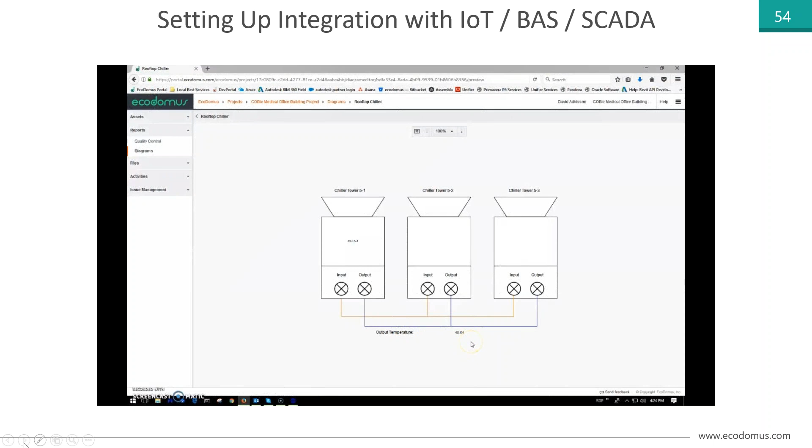Quickly about laser scanning—we support E57 and LAS, as I mentioned earlier. We also worked with Leica, supporting TruViews. We can tag assets within the TruView, so you can click on this red dot and it will pull up the values for the asset you specified.

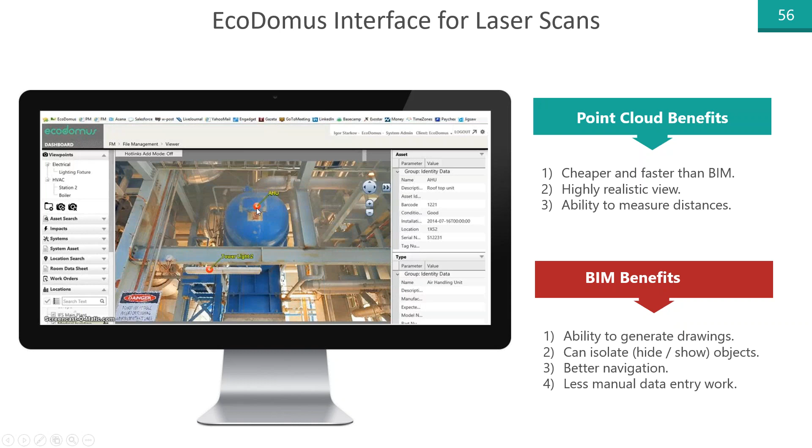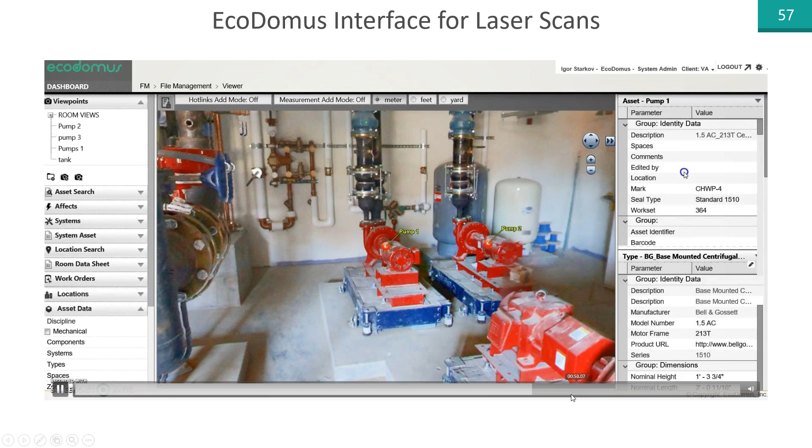Here are some potential use cases. Let's say you have a work order for a pump that's making noise and smelling bad. You jump to the pump profile and say show me that pump in my viewer, and it will load the TruView and find within it where that pump is located. You can identify the pump and pull up its properties, and in addition to properties, you can see its documents—all of that information is available to you.

Now let's look at the questions. Can vendors upload bill of materials and parts 3D data into the model BIM data? Yes, we can upload any kind of attribute into the model—types of properties are extendable and customizable. So you can use, let's say, cost data or schedule data, and this can all be assigned to an object.

For the digital twin, did they use 3D scanning? Actually, they did—they had laser scanning, which I think was gifted to them by either Leica or someone else, because they're considered UNESCO heritage or something like that, so they got laser scanning for free. I'm not 100% sure, but they did use laser scanning to verify the model.